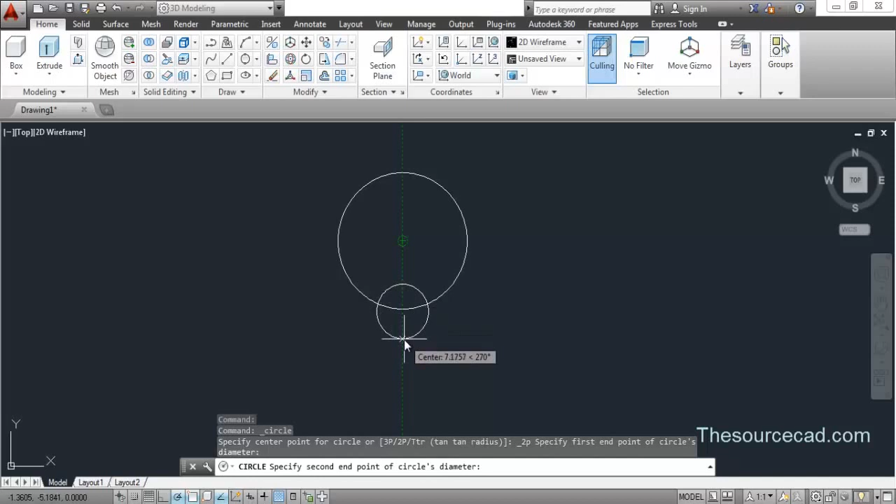Now go to tan tan radius circle. Click on this circle, then this circle, and enter the default value of radius. You don't need to enter any value, just press enter.

Now go to trim and trim these extra lines which are indicated on the screen right now. Okay, so now you have got the trim.

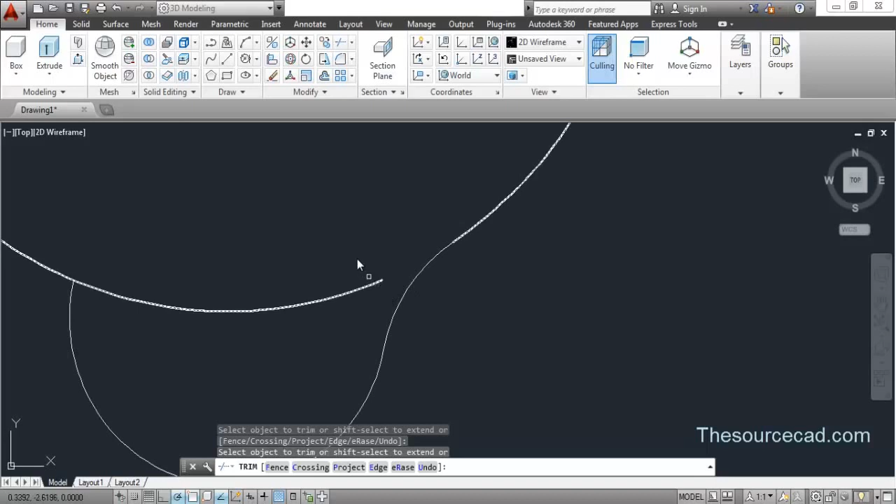Now make a line, drag the center, go upwards and make a straight vertical line, something like this. Now we need to go to the trim tool again and trim all the remaining portion which is no longer required. I think we need to delete this one also, so delete it.

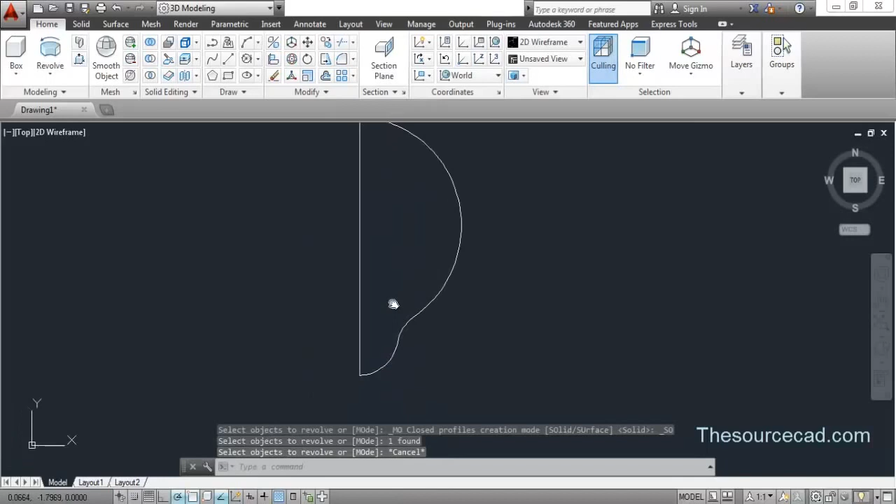Now let's go to the line tool again and make a line like this. Go to trim and again trim all the remaining lines. Okay, so we have the profile of the half bulb complete here.

Now join it, so select them and click on the join tool. Now it's joined into a single polyline.

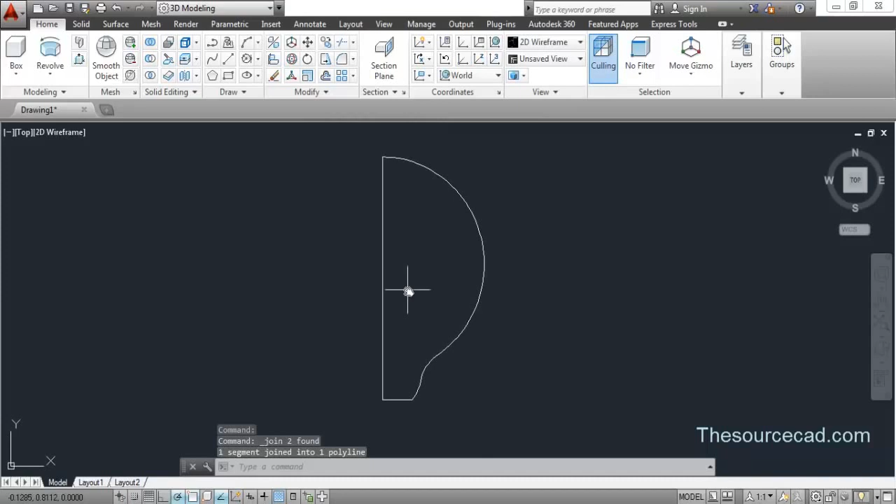Now we are going to revolve it, so go to revolve, select this profile, enter, and click on any of the 2 points on this line and press enter. The default value of 360 degrees for the rotation angle has been selected, and now let's move ahead.

Okay, so we'll now make the base of this bulb. I'll use polyline for this. Drag the center and click on this point, somewhere close to that. You don't need to be precise, as I already told you.

Now make a profile like this, drag the center point, click here, and close this loop. Make sure this loop is completely closed. Now again go to revolve, select this profile, enter, and click on any of the 2 points on this line and press enter.

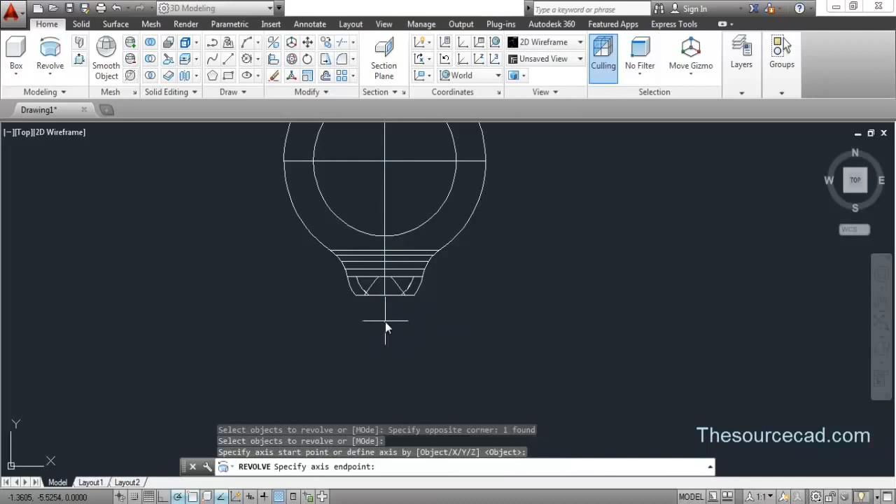Now let's have a look at it in the 3D view. For that, let's click on this home icon, and here's the 3D view.

Make it more clear using the visual style shaded, and now you can see the drawing more clearly. Okay, so here we have our model.

Now we need to make other features of this drawing. So before that, I'll go to UCS face, select this face, and press enter.

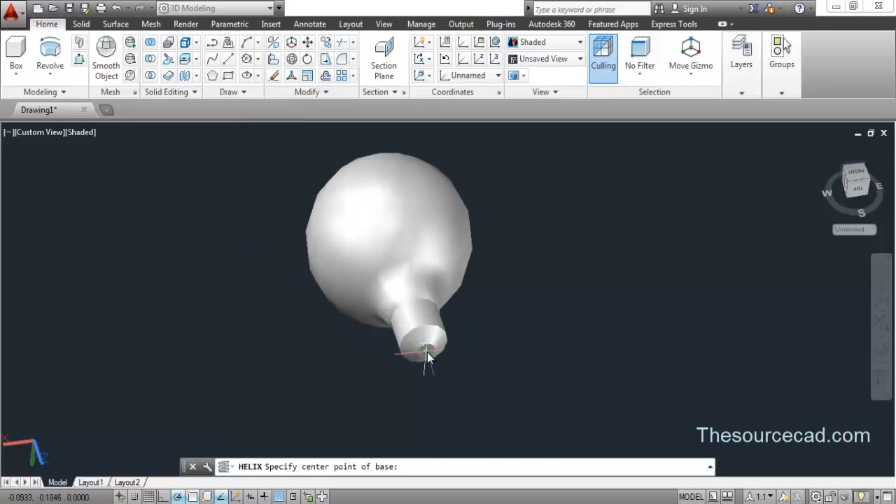Now let's go to the helix tool, click on the center here, and enter a radius of 1.5 units. This is an approximate value, so I'm entering both the radius, 1.5, and the number of turns, T for turns, 5.

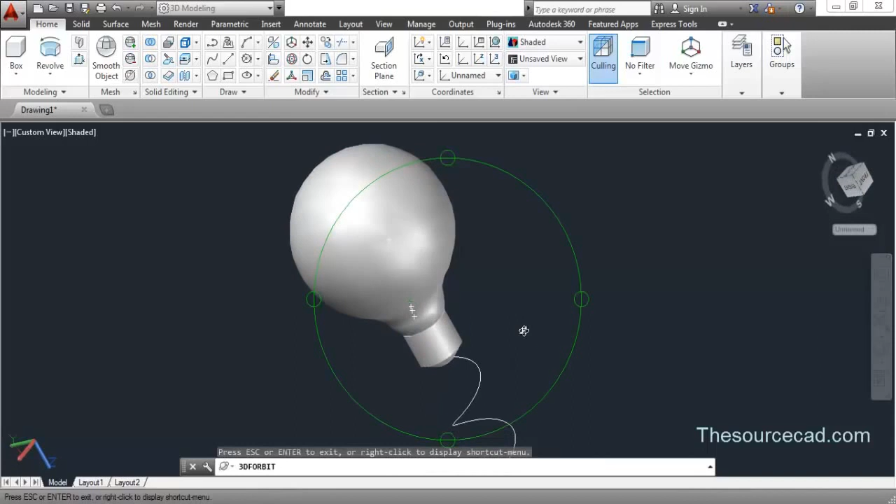Now, as you can see, the helix is going down, so I need to enter a value in a negative way. I need to enter a negative value for the height of the helix because the helix is going down, and I need to make it go upwards.

So I'll enter a negative value, and this value is also approximate. It's coming to something around 3, so I'll use minus 2.5. Okay, so now here we have it.

Now make a circle again of radius 0.25 units. So here we have the helix and a circle.

Now go to the sweep tool, select the circle, press enter, and select this helix. Okay, so here you will find this coiled profile after going through all these steps.

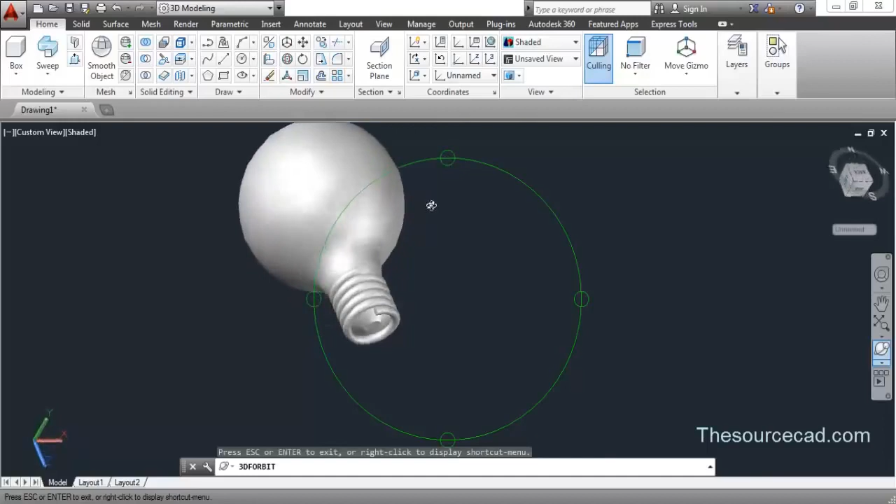Now we need to subtract these 2 profiles. So go to solid editing and the subtract tool, select this central object and then the sweep, and press enter. So here we have the threaded profile for this bulb.

Okay, so we are done with this. So what next? Let's make this bulb transparent now.

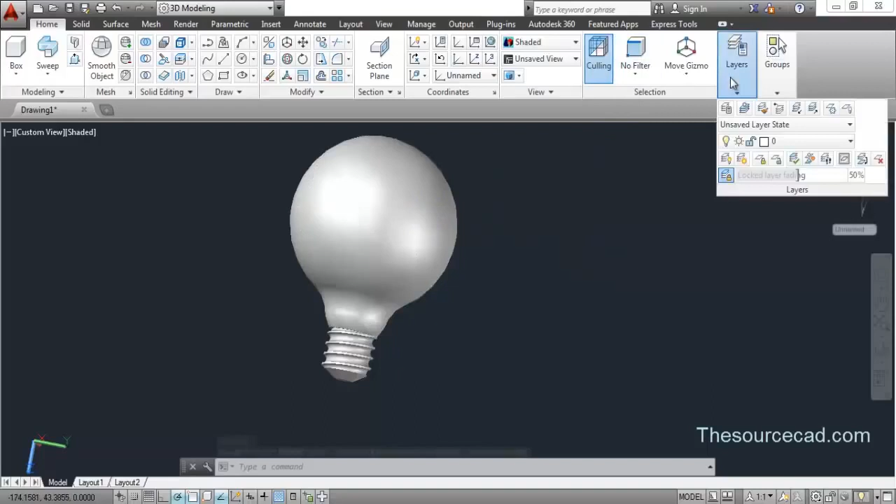So for making it transparent, I'll go to layers, select the layer properties manager. This window will pop up, and here let's make 2 more layers. I'll color one of the layers with the yellow color preferably. Okay, and let's apply transparency.

So go to transparency and apply a transparency of 70 units, and press OK.

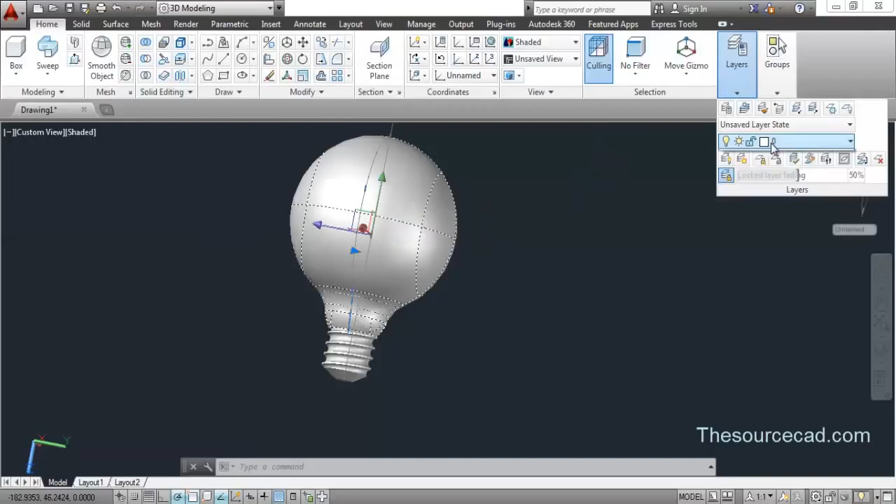So here, now assign this object to layer 1, deselect it, and click on TPY, show/hide transparency, on the status toggle. So now this glass is a little bit transparent.

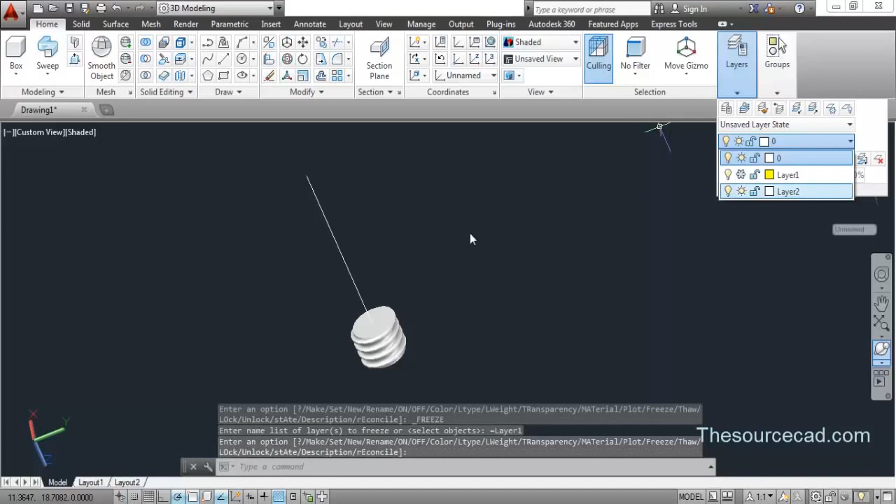Now let's turn this off, or you can just freeze it, because we don't need it right now, and we'll make another feature of it.

Okay, so we are done up to this point, and now let's make a shell of it. Click on shell, click on the icon, and enter a shell offset thickness of 0.5. So here we have the shell.

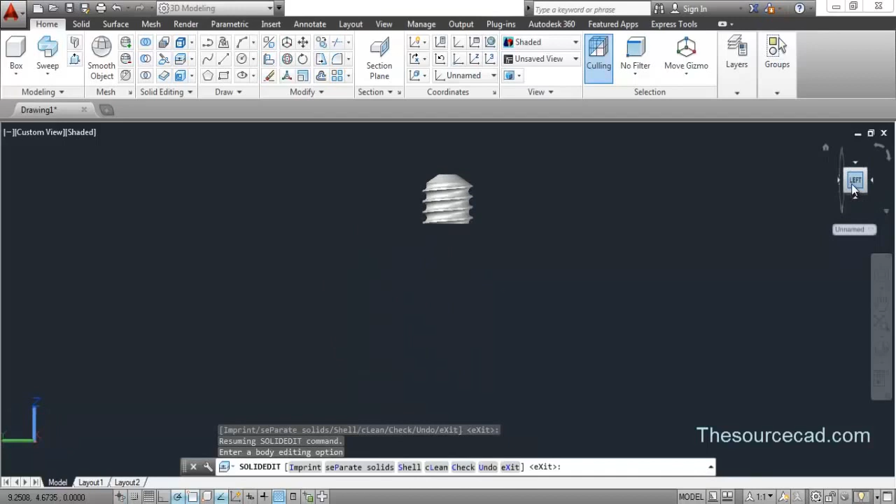You can select any other thickness value if you want, so you don't need to be exact in this case.

Now let's go to this coordinate. I've selected this face as an XY plane, so I'm changing the coordinate to make my current face the XY plane.

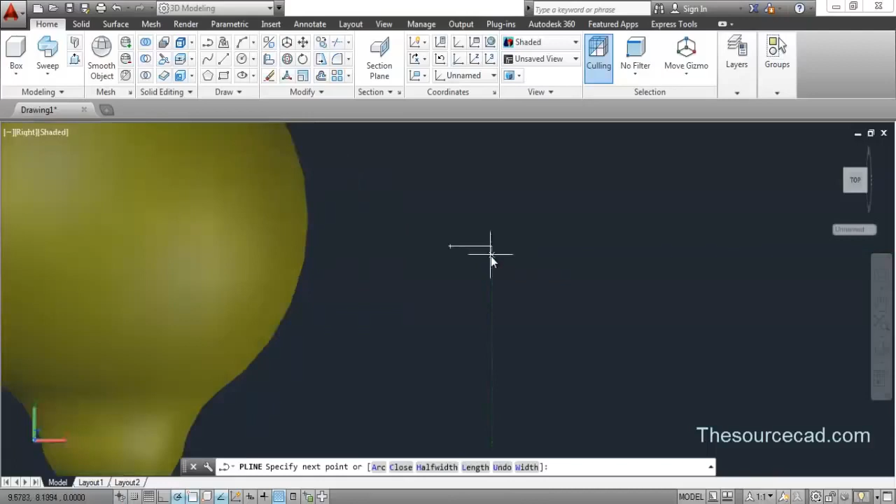Now let's unfreeze the layer which I had frozen earlier, and I'll make another profile, the filament and internal profile of this bulb. I'll use the polyline tool to make a profile something like this. I've unfrozen this bulb to give you an idea of how long this profile is going to be.

Carefully make this thing similar to what I'm drawing here right now. Okay, let's click here. This seems okay.

Now let's track that point, and okay, so here we have a complete closed loop.

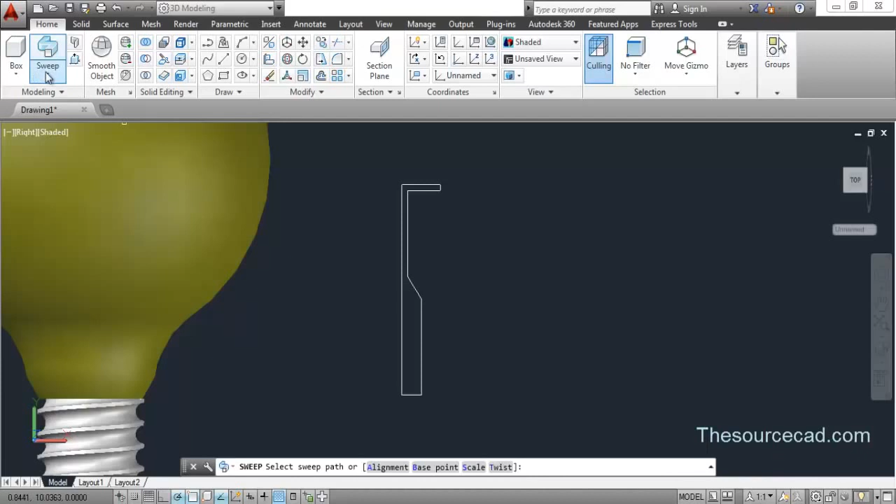Now go to the sweep/revolve tool, and let's go to revolve. Select this profile, enter, and click on 2 points on this line, then press enter.

Okay, so here we have this profile, you can see it clearly here. Now I'll change this view to XY, so click on view, and it changes to XY.

Now make a rectangle, something like this. You can turn O-snap off if it's annoying or if it's snapping at points you don't require. So make a rectangle, something like this.

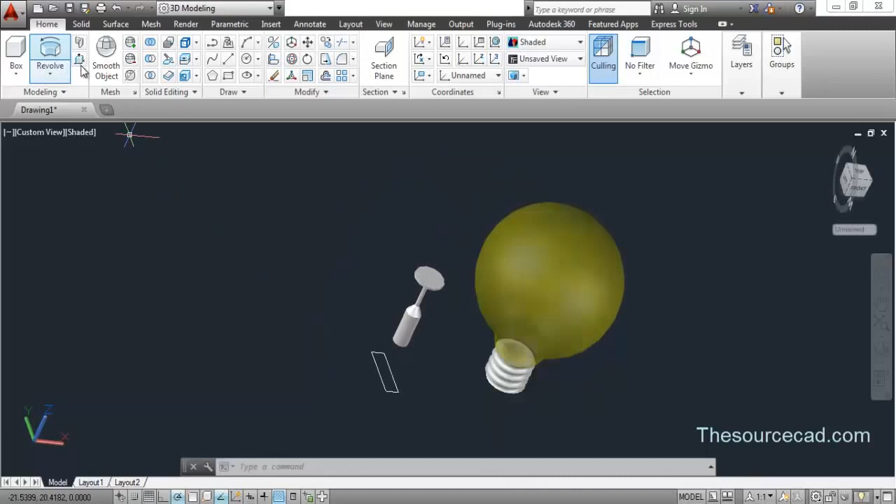Now orbit it, and let's extrude this rectangle. So go to the extrude tool, select the rectangle, press enter, and extrude it completely like this.

Now I'll intersect it, intersecting both the profiles. So select this profile and press enter. Now we have the intersected profile here.

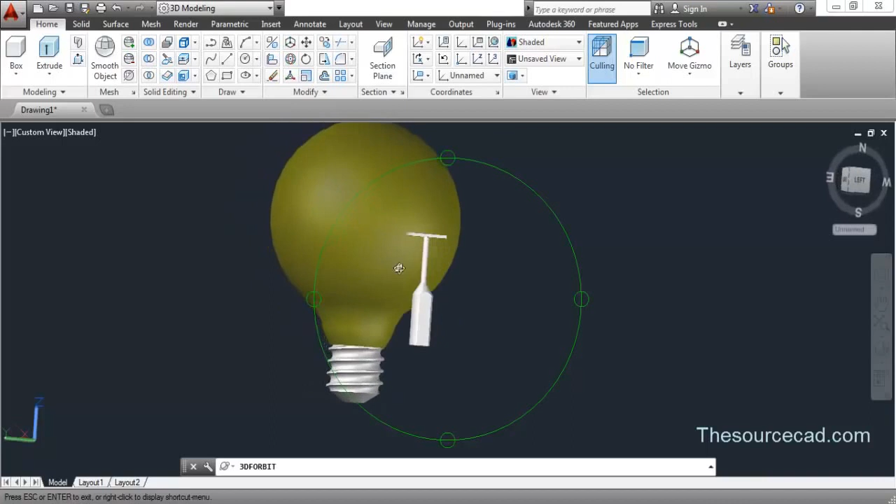Now all we need to do is make a filament. That's all we need to make, everything else has been made. So let's start with the filament.

Again, select view in our coordinates. Now this coordinate is aligned to our view. Now let's make...

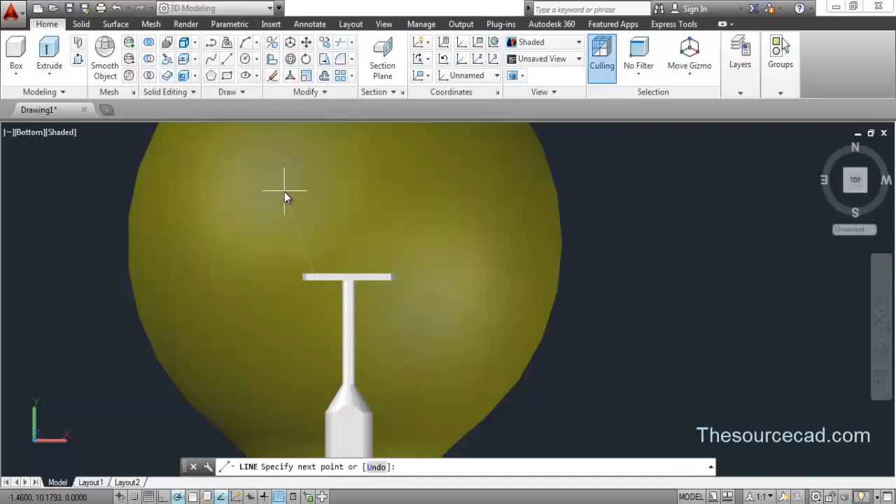These filaments - okay, I'm using this as a reference. You can make it somewhere else also, but it's better if you use it at this place only.

Let's make this. Now go to mirror, select this, and turn on selection cycling so that you avoid accidentally selecting any other feature which you don't require.

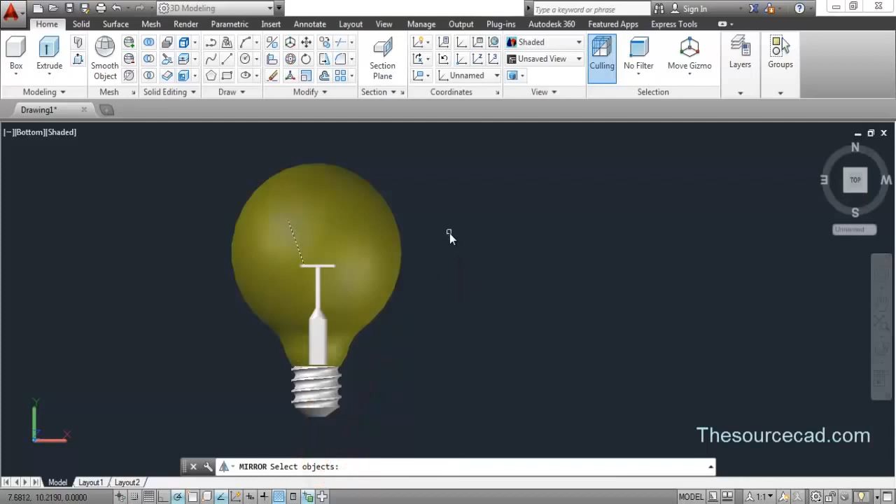You can turn O-snap on if you need. Now click on the center marker here, it's showing. Now click anywhere, upwards or downwards, and here is the mirror.

I think you're aware of the mirror tool, so all you need to do is just apply a mirror to this drawing, to this particular feature.

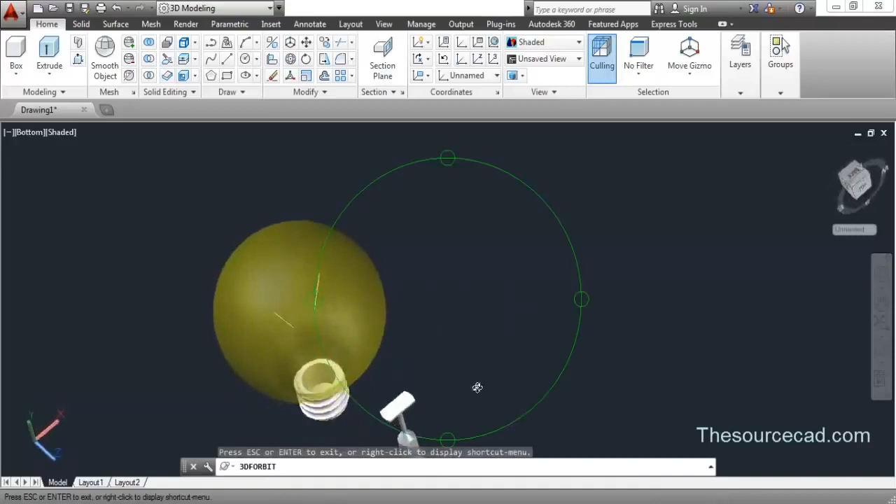Now as you can see, it's not lying at the place where I want, so I'll select both the features, both lines, and move it. Now go to move, and move it to a point on this.

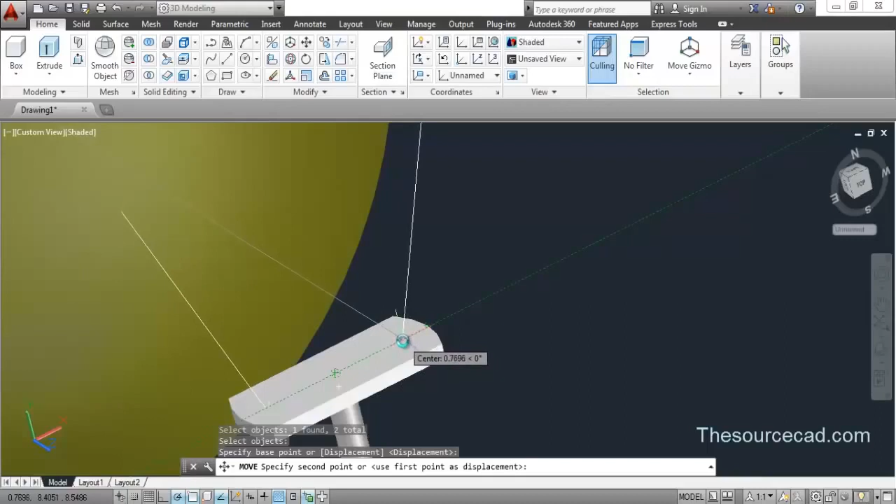So for that I can track the central O-snap - yeah, the central O-snap can be tracked. Okay, and click on any of the desirable points. Here it seems perfect. Okay, now here we have it.

As you can see, I am just manipulating it in the complete 3D view. There is no need to be accurate.

Now let's go to 3-point arc and make an arc, and here you have it.

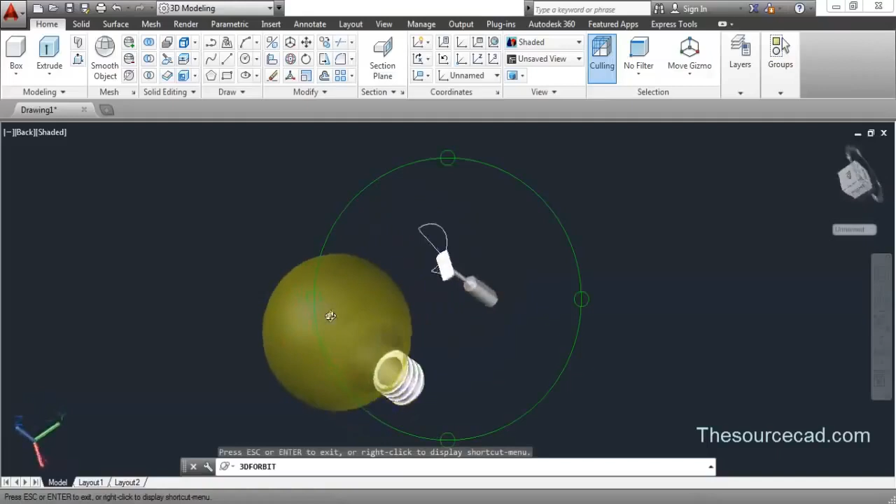Now the filament is also complete, and now we need to add a thickness to this. But before adding thickness, I'll join all three profiles together.

So these two lines and the arc - select them all, go to the join tool, and here we have all three profiles connected.

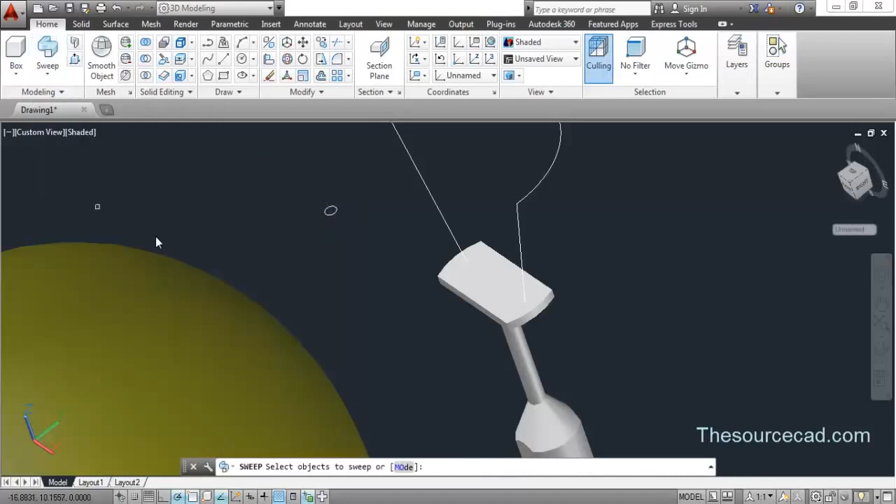Now make a circle with a radius of 0.1 unit and go to the sweep tool. Select the circle, enter, and now select this profile. And here we have a thickness added to our filament.

Okay, now all we need to do is move it to the center of this bulb. But these two are different objects, so I'll first join them all.

For joining them all, you need to group them, but let's give it a color first to clearly distinguish from each other. Okay, so now you can see that these two are different objects.

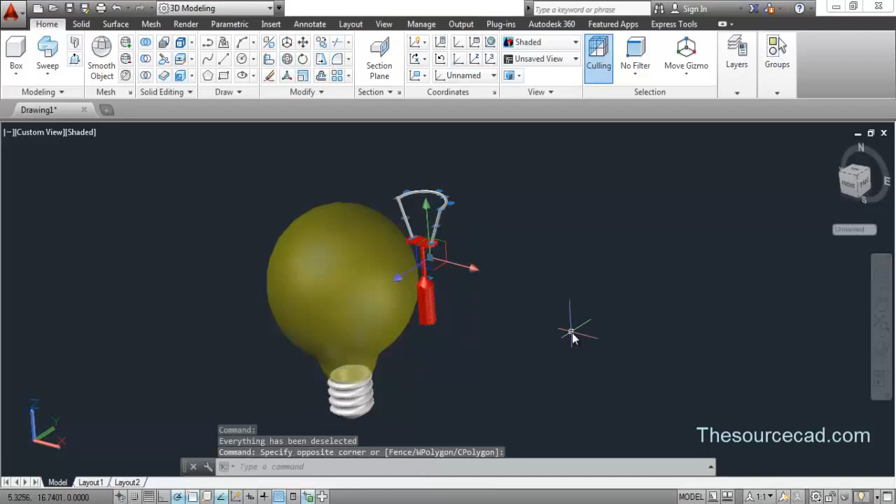So select them and go to group, and click on group. Now these two objects are temporarily joined to each other.

Now go to move, click on the center O-snap marker, and we need to orbit it, I think. Okay no, here's the point, so snap on this point. So we are done with this.

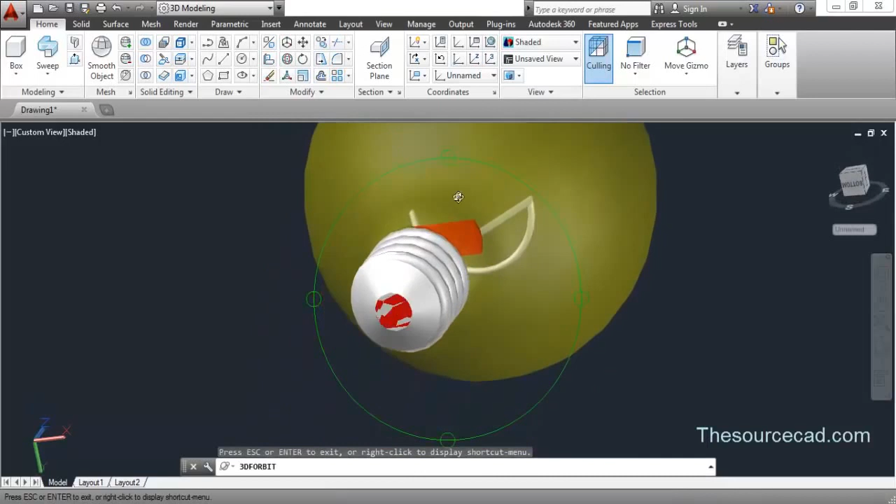If you want, you can move it upwards a little bit. If not, you can leave it here also.

If you need to manipulate, just select it and use this gizmo. If the gizmo does not appear, go to this move gizmo, which I'm showing on the screen right now. So this will appear - click on this arrow and move it upwards a little bit.